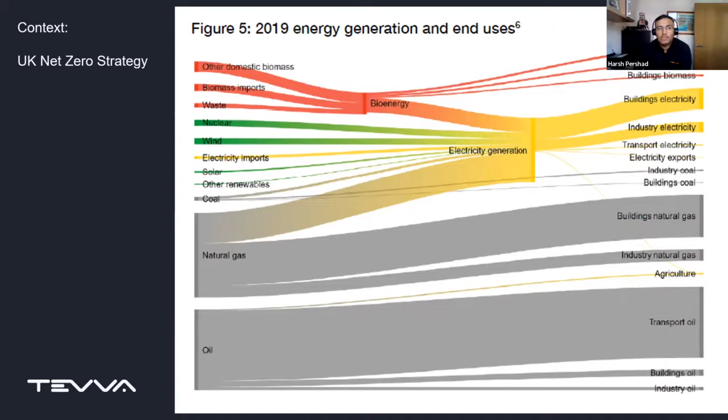And I think that's important to set that, because people are often worried about, well, what's the efficiency of hydrogen production? And actually, if you need to make the hydrogen to make the best use of your wind, then the focus on the efficiency of it at that early stage is probably actually not that important. So I just wanted to set that context.

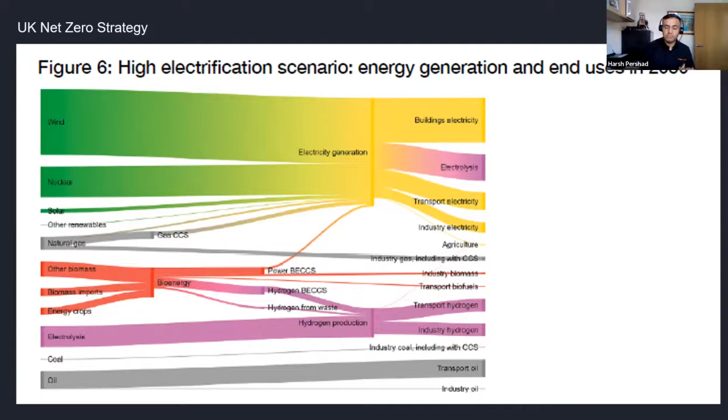There are other scenarios that BEIS published. This is one which is with even higher levels of hydrogen in it, and a third one where a lot of that hydrogen is coming through natural gas with CCS. So quite a few different 2050 scenarios, which are all least cost or least risk or most politically acceptable.

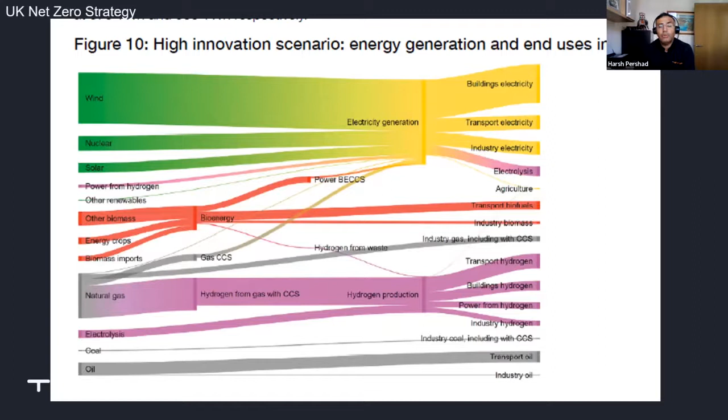They all have a large level of zero carbon electricity and hydrogen. So the hydrogen is going to be around anyway. So that's useful to understand. And electricity growth, huge amounts of electricity growth, are really, really fundamental.

Now I'll dive into our company, Tevva. Tevva's 9 years old, founded by Asher Bennett, and it's a technology company. We've been building battery electric trucks for a while. We're on our third generation battery electric truck, getting lots of investment. I'm sure most of you are aware it's a great time to be raising private investment in low carbon, which it hasn't been for a very long time.

So it's great that things like COP26 have really made a difference to the amount of global interest in zero emission solutions. We've got a lot of people who've come from the transport sector, so people who were in conventional diesel-fueled ICE systems have come over to work with us. There's some people there.

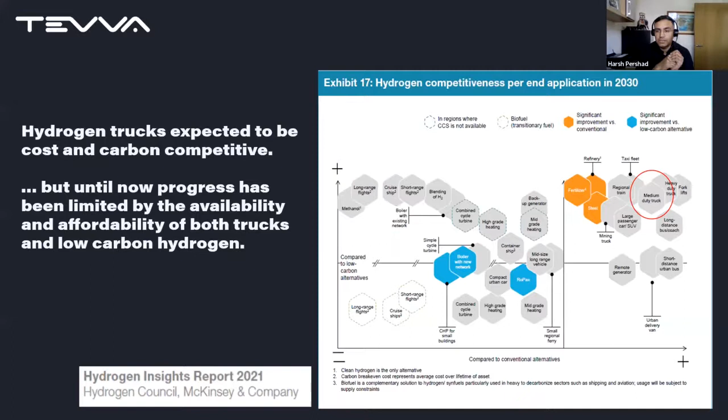Lots of different groups have concluded that whether you're looking on a cost basis, which is the horizontal axis, or the carbon basis, which is the vertical axis, trucks are potentially a really good use of hydrogen. They are currently, however, very much limited by the availability of the trucks and the availability of any hydrogen. And we have a solution, which is a hydrogen fuel cell range extended battery electric truck.

So our 7.5 ton electric trucks have been on the road for several years now. And we're soon to be launching our much longer distance, 200, 300 mile trucks. And what's really exciting about those is where the battery trucks are good for short distances, the fuel cell range extended ones can really tackle the majority of truck energy demands.

So whether that's high payloads or long distances, or both high payloads and long distances, in the 7.5 ton to 19 ton truck market, where we're one of the only providers. The model is, as I said, range extension.

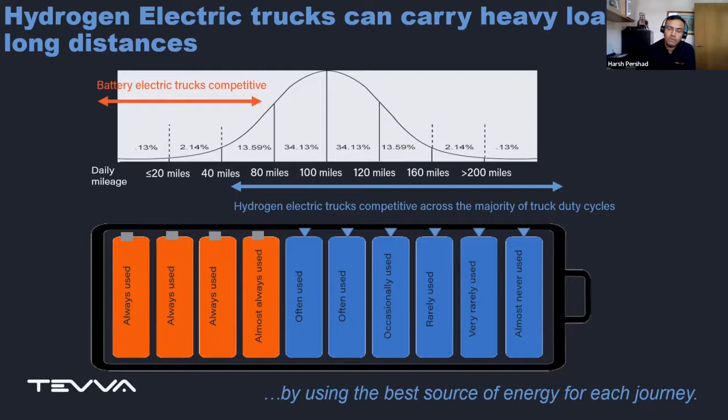So you have batteries which are nearly always used because electricity is currently much cheaper than hydrogen, and you have hydrogen tanks which may be used some of the time, for the largest trucks probably much more, but really use software then to manage the best source of energy for each journey. And we've got our own battery packs and software management systems.

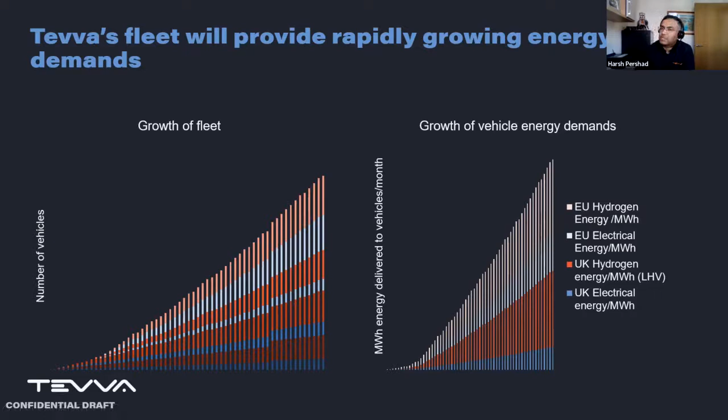And that brings us to a really interesting set of challenges. I showed you a picture of the 7.5 ton truck. We're also launching a 12-ton and 19-ton truck over the next year as well. In this weight range, 7.5 ton to 19 ton trucks, a lot of the trucks stay at a customer depot overnight, and that feels the best location for electric charging and probably for hydrogen refueling.

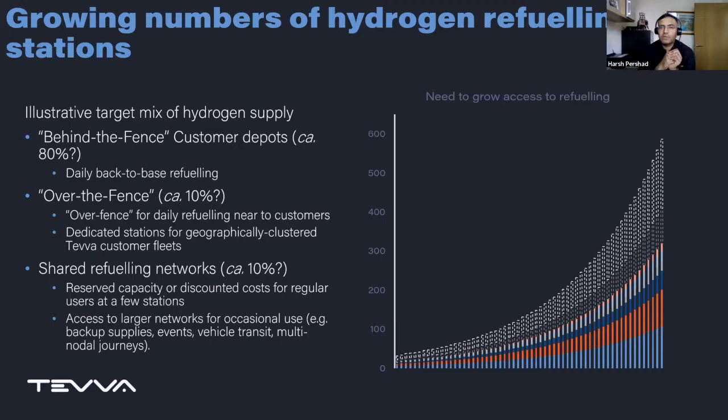Some could be over the fence where you're clustering vehicles quite close together, and some of it might be with shared refueling networks. And that's probably most likely for hydrogen or really fast charging. But that then leads to a question: if you're doing work at depots, typically people aren't going to suddenly swap over all their fleet. How do you phase up? Should you phase the growth of energy infrastructure, or should you future-proof from the beginning?

And each time you go in and add in some new charging capacity, it takes time, adds cost, and there's a lot of disruption there, particularly if it requires any digging up for cable laying, or if you're putting in any fixed facilities for, say, on-site hydrogen production. Probably at the beginning, you can use a lot of existing infrastructure and small mobile refueling solutions. But over time, to get the best economies of scale, you need to grow from fairly small depots up to depots where hopefully you've phased out diesel vehicles by the end of this decade.

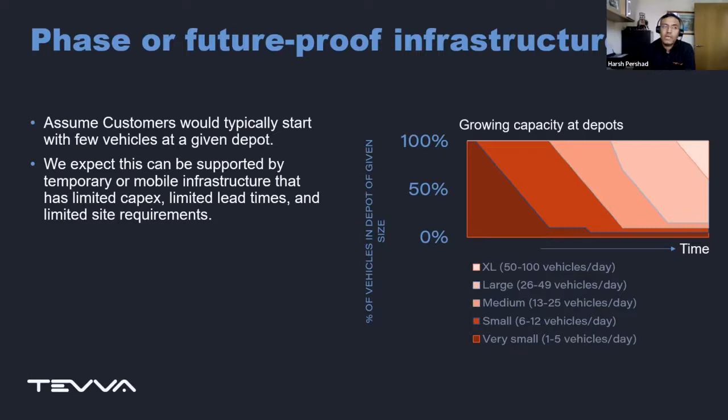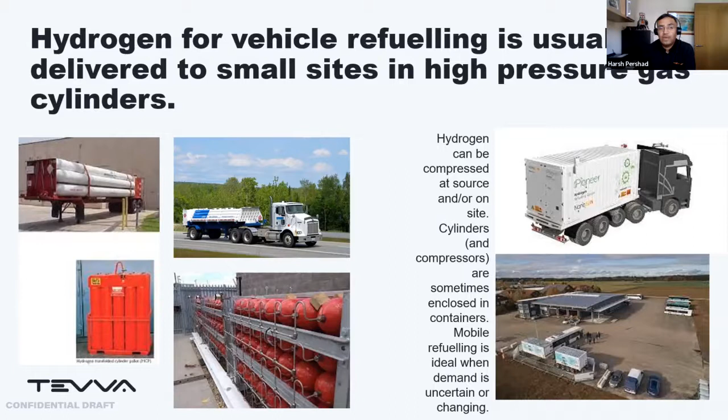There are a lot of companies that are really keen to phase out their diesel commercial vehicles as quickly as possible. So that's a challenge, how to grow that over time. Today's technologies for small scale refueling are mostly these kind of cylinder packs. They're transported on the back of lorries and delivered to sites. And that's a fairly practical, quite well-known approach. It's getting better and better.

And the actual act of refueling, for those of you who aren't familiar with it, is very similar to refueling a regular vehicle and designed as such. The protocols for commercial vehicles aren't yet as good as those for passenger cars in terms of hydrogen refueling, but there are working groups trying to work out what the next steps are with those.

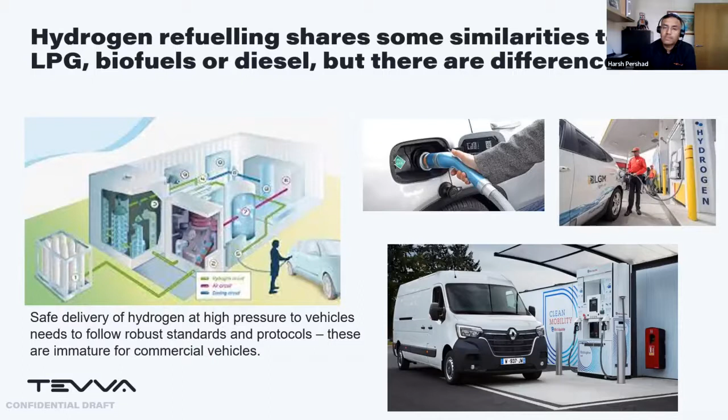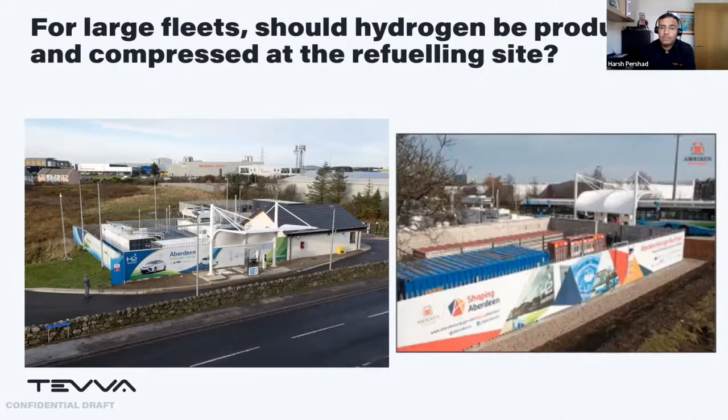And for the largest fleets, on-site hydrogen production is possible. That's where the economics stack up best, when you're making quite a lot, then compressing it locally. These pictures are from Aberdeen, where their bus depot has been operational for some time now, and they produce the hydrogen on site. The change from diesel to electricity and hydrogen, though, requires many different touch points for customers with energy that they're not used to.

So how should a truck manufacturer like us support those customers to access the energy they need? Because obviously we've got a vested interest in making sure that they have our trucks. So it's quite interesting to work out how you facilitate the use of trucks without overloading your customer with so much pain that they get put off because they don't know what options are available. They haven't had conversations with their electricity provider, with the planning authorities nearby, with their neighbours, or even between different parts of their operation.

Fleets are not just one size vehicle. There could be quite a lot of different ones. How do you plan for how and where you put in chargers and refueling infrastructure, what information needs to flow and between whom, how much do you contract, and how do you match those contracts with the vehicles and the usage, and how do you ensure that when all that goes on site, it's a positive experience and doesn't dissuade people from adopting electric vehicles or hydrogen vehicles? So how do you align all the training and the comms for customers?

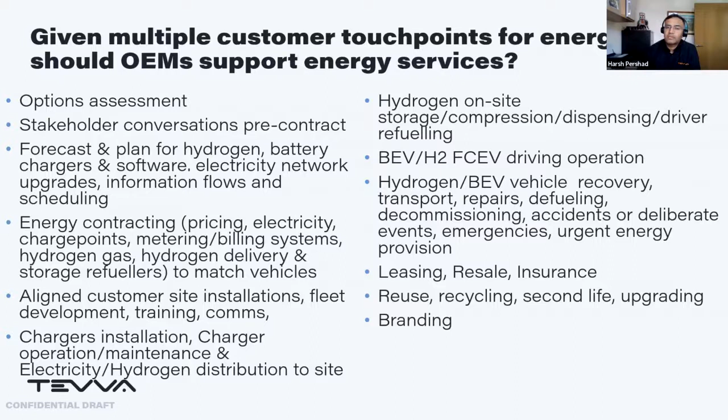And of course, you look ahead, and often people buy vehicles thinking about what's the residual value at the end of this, and what am I going to do at the end of this? Who's going to buy it? Am I going to be left with stranded energy infrastructure? Or they could be actually left with positive infrastructure that enables further decarbonisation if you future-proof it. So there's lots of different touch points that logistics companies just have never had to deal with. And I think that's a really interesting disruption to that market.

Some of our challenges: anybody who's been in this sector knows that there's an enormous gulf between EV fans and hydrogen fans, and it's very tribal, and very few people are comfortable with the various ways of making electricity, the various ways of making hydrogen, the best ways of matching where you make and how much you make with what you need and when you need it.

How do you take a fairly conservative sector like commercial vehicles, where people have just bought outright, they've kind of then severed their links with their suppliers? How do you change that to a model where you've got more integrated services?

In terms of just locations, should we choose places where we've got lots of energy infrastructure? So in the north of England, it's much easier to get grid connections, much easier to get hydrogen, we think, with, for example, all the great proposals for Teesside and the Humber area. But at the moment, things like the clean air zones are in big cities, for example, around London. And so there's a kind of a question about where do you site to grow? Do you take a demand-led, do you take an energy supply-led question? And also, what are other people doing? If lots of people cluster around a place, the economies of scale and the capabilities just get so much better.

Coordinating volumes across both electricity and hydrogen and vehicles, and then end users. This is quite a challenge, one that any individual company would struggle with, but there doesn't yet seem to be any one-stop shop or kind of organization for both the EV sector and the hydrogen sector to together coordinate the growth of low carbon energy for decarbonizing the transport system.